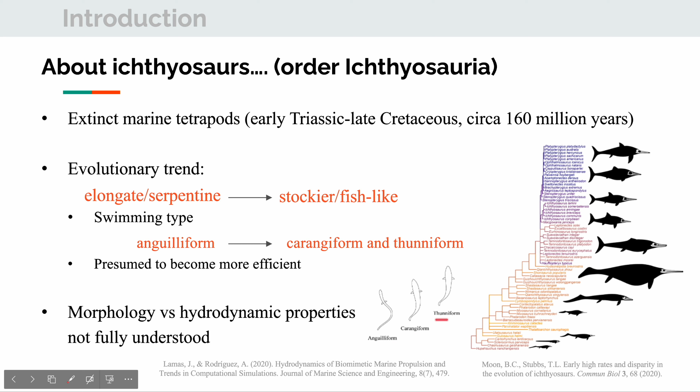When it comes to the locomotion of ichthyosaurs, there are still many questions about the relationship between their body plan and how they moved. Previous studies mainly focused on exploring their fossil morphology, leading to the question of whether a fish-like body plan is more efficient for swimming. While the hydrodynamic properties and cost of transport associated with this body plan remain unknown, some studies attempted to represent the shape of ichthyosaurs using empirically derived formulae, such as ellipsoids. However, these representations often deviate significantly from the actual shape of ichthyosaurs.

The aim of this study is to explore the locomotory strategy of ichthyosaurs. Specifically, the authors want to identify the effect of changes in their body plan on their locomotory energy cost and hydrodynamic properties.

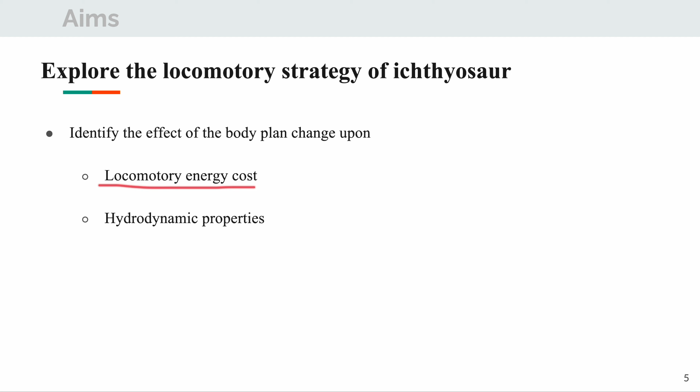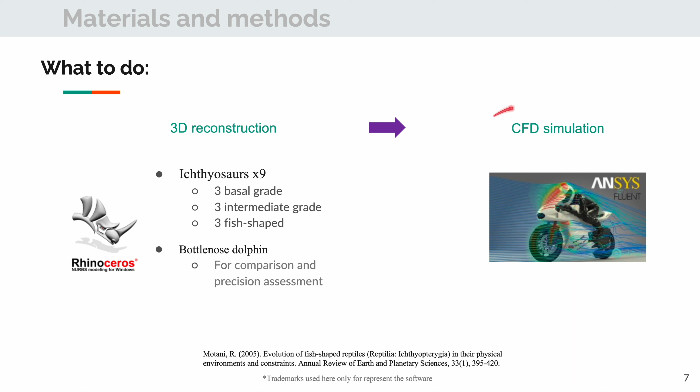Let's move on to the material and methods part. What they would do is to create 3D reconstructions of 9 ichthyosaurs and a bottlenose dolphin using Rhinoceros software. The ichthyosaurs would include 3 basal grade, 3 intermediate grade, and 3 fish-shaped specimens. The bottlenose dolphin would be used for comparison and precision assessment. After the 3D models are created, the authors would then perform CFD simulations on them, using ANSYS Fluent software.

In this study, 3D models of ichthyosaurs were reconstructed, based on well-preserved fossils. Basal-grade ichthyosaurs have a slender body shape, intermediate-grade ichthyosaurs have a transitional body shape, and fish-shaped ichthyosaurs have a torpedo-like body shape. The categorization of these grades was referred to a previous study. In addition to the ichthyosaurs, a bottlenose dolphin was also reconstructed, for comparison.

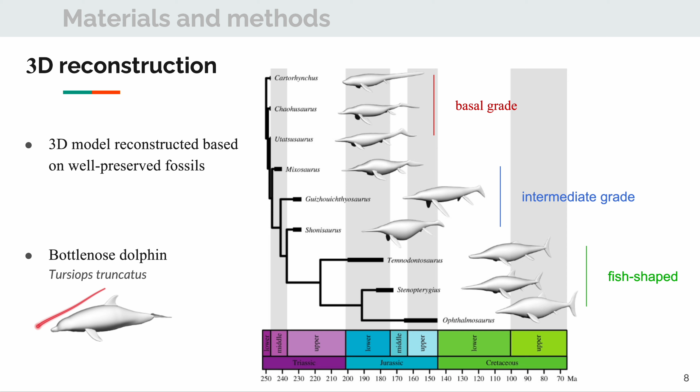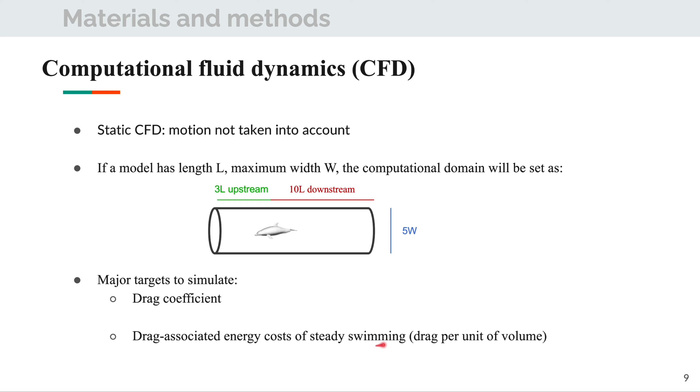In this study, static computational fluid dynamics simulations were used, meaning that motion was not taken into account. For a model with length L and maximum width W, the computational domain was set as 3L upstream, 10L downstream, and 5W in width. The major targets of the simulations were the drag coefficient and the drag-associated energy costs of steady swimming, or drag per unit of volume.

A static model was used for the computational fluid dynamics simulations. This decision was made for several reasons, though static models tend to underestimate the drag coefficient. Kinematic models, which take motion into account, are computationally expensive and require large sets of assumptions. Previous studies have shown that morphology alone has a crucial effect on drag, and static models can effectively mimic underwater gliding, which is common among aquatic animals.

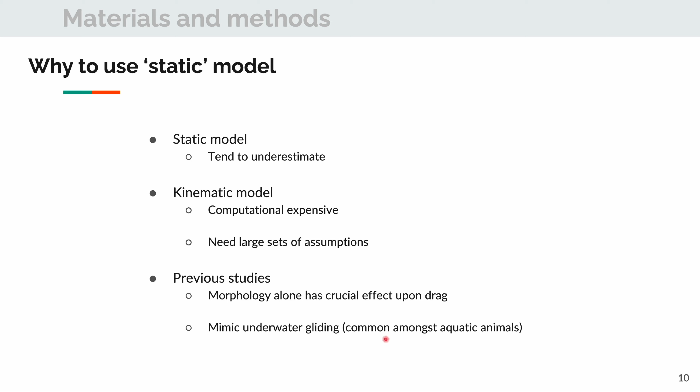Computational fluid dynamics (CFD) simulations were used to calculate the drag coefficient (C) of the 3D models. The drag coefficient is composed of two components, the frictional drag coefficient, CF, which is tangent to the object, and the pressure drag coefficient, CP, which is normal to the object. The total drag coefficient, CD, is the superposition of these components: CD = CF + CP.

The drag coefficient can be calculated using the equation C = 2D / (ρU²S), where D is the drag force, ρ is the water density, U is the flow velocity, and S is the surface area. Just notice that the drag equation, D = 0.5ρV²SC, can be derived from the kinetic energy equation.

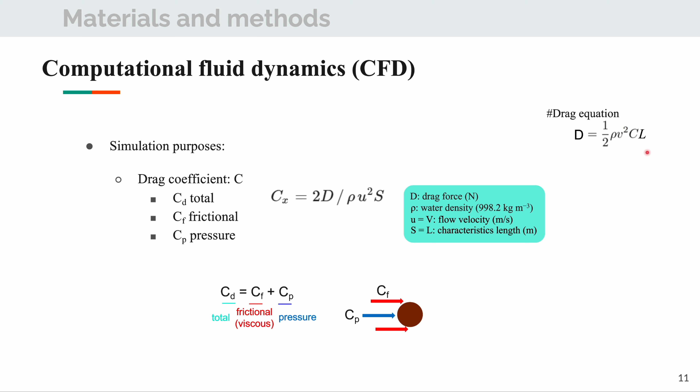One of the purposes of the CFD simulations in this study was the drag per unit volume, which represents the drag-associated energy costs of swimming. This is calculated by determining the energy spent in transporting a unit of mass a unit of distance, known as the cost of transport, COT. The COT due to drag, COT drag, can be calculated as COT drag = P drag / (mU) = D / (ρV), where P drag is the drag power, m is the mass, U is the velocity, ρ is the water density, and V is the volume, which is used as a proxy for mass.

The net COT, COT net, represents the fraction of COT that is truly used for locomotion, excluding other factors, such as muscle efficiency and metabolism. This can be calculated by dividing the useful power, P thrust, by the total power, P out, giving the propulsive efficiency η. If swimming at a constant speed, then P thrust equals P drag, and COT net can be calculated as COT net = P out / (mU) = P drag / (ηmU). In this study, a value of η = 0.81 was used for parvipelvian ichthyosaurs, and η = 0.48 was used for all other ichthyosaurs.

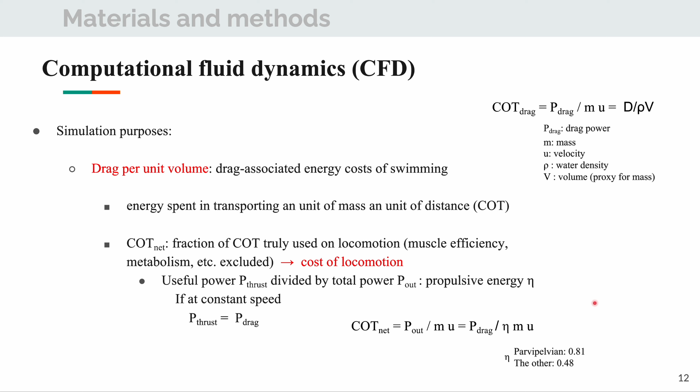In this study, the CFD simulations were performed under specific conditions. The Reynolds number, Re, which represents the ratio of inertial forces to viscous forces, was set to a range from 10^6 to 5×10^7, based on data from extant marine tetrapods.

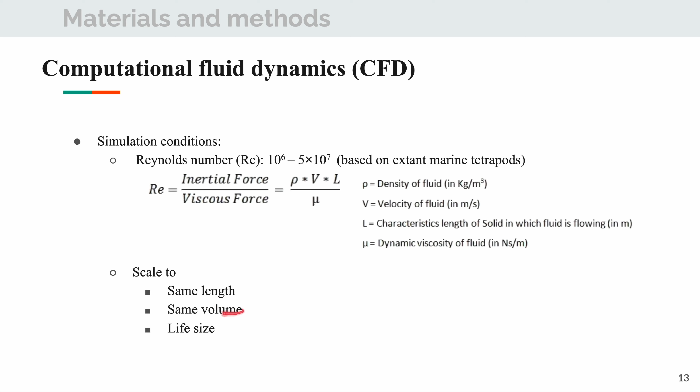The Reynolds number can be calculated as Re = ρvL/μ, where ρ is the water density, v is the flow velocity, L is the characteristic length, and μ is the dynamic viscosity. The results of the simulations were then scaled to the same length, volume, and life size for comparison.

It is important to note that this study is not concerned with the absolute values of the propulsive efficiency η, or differences between individual taxa. Instead, the focus is on the relative impact of changes in swimming mode on the net cost of transport, COT net, compared to the relative effect of changes in body shape.

Okay, then the next part will be results and discussion. The CFD results showed that the drag coefficient of ichthyosaurs did not change significantly with geological time, morphological grade, or the presence of limbs. The left panel is drag coefficient under different Reynolds number.

Without and with limbs, the upper right panel is the average CD through geological time in million years, without and with limbs. While the figures at right bottom are the drag coefficient amongst taxa, just from the collapse of figure A and B. There is no significant difference between taxa in all figures shown here.

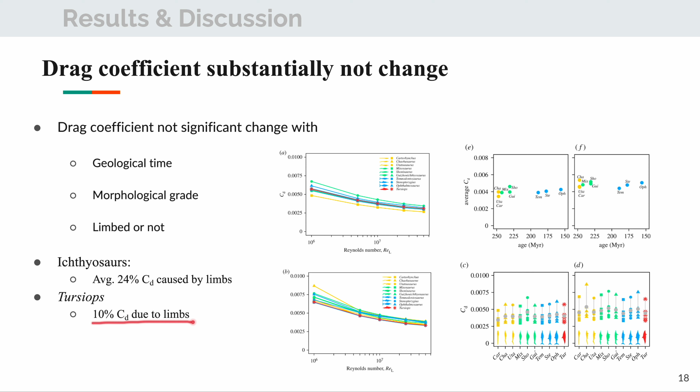On average, 24% of the total drag coefficient, CD, of ichthyosaurs was caused by their limbs. In comparison, Tursiops, the bottlenose dolphin, had only 10% of its CD due to its limbs, since ichthyosaurs' flippers are larger and their hind limbs present. Okay, a brief summary. Drag coefficient substantially not dropped through ichthyosaur evolution.

The results showed that, when the models were scaled to the same length, the basal group had a relative drag per unit volume 1.4 times greater than the other groups. This increase in drag was found to be correlated with an increase in the surface area to volume ratio, indicating the frictional component of drag was dominant.

However, when the models were scaled to the same volume, there was no significant difference in relative drag per unit volume between all groups. The upper panel is the relative drag per unit volume of unlimbed and limbed objects at same length. The basal group is significantly higher than the others, and all the ichthyosaurs are higher than bottlenose dolphin.

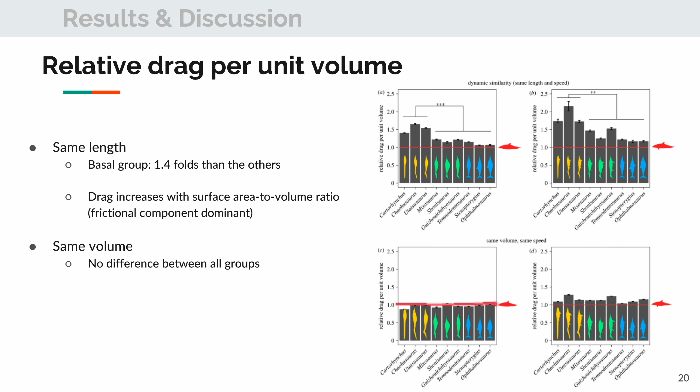The lower panel is roughly in the same condition, but scaled to the same volume. In this case, all taxa are basically at the similar level, and some even bearing lower value than bottlenose dolphin. Brief summary. Relative drag per unit volume not changed due to body plan.

The result showed that the cost of locomotion was mainly determined by the size and swimming mode of the ichthyosaurs. The net cost of transport, COT net, was found to be different between swimming modes, with anguilliform swimming less efficiently than other modes. The COT net also varied between different size groups due to the fact that volume increases with the cube of size, while surface area increases with the square.

The COT net was found to vary between different geological periods due to changes in the size of ichthyosaurs over time. The upper figures are the COT net of models without and with accounting for their swimming mode, standardized by bottlenose dolphin, the red line. The anguilliform swimmers have higher cost of locomotion.

The bottom right panel is the same as above, but put back to real size. The larger ichthyosaurs have lower cost of steady swimming, some even lower than bottlenose dolphin. And the figure at the left bottom is the COT net of ichthyosaurs through geological age. You can observe that, after their first 25 million years of evolution, their body size maintained at a constant level.

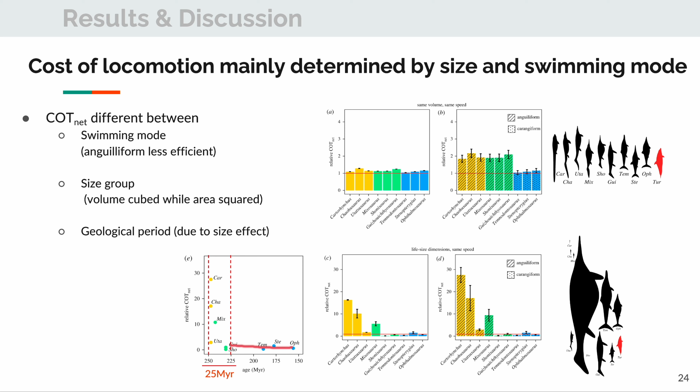Brief summary again. Size plays a dominant role while swimming mode has a minor effect on the cost of locomotion. Net cost of locomotion reduces significantly during the first 25 million years of ichthyosaur evolution.

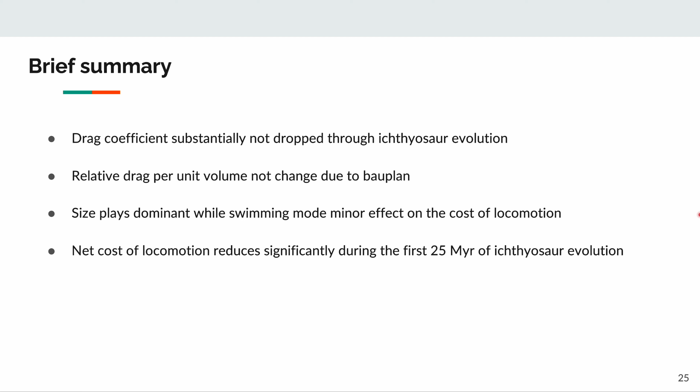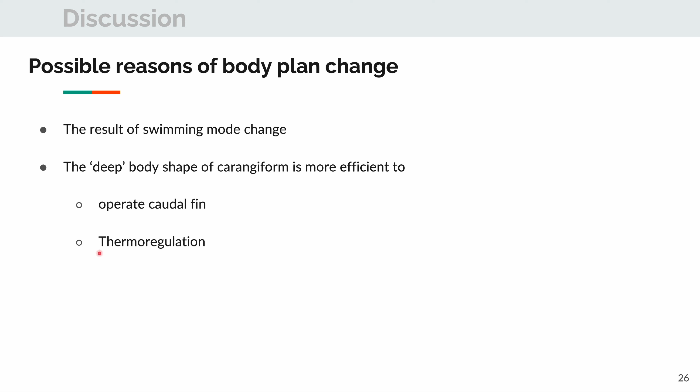There are several possible reasons for the changes in body plan observed in ichthyosaurs over time. One reason could be the result of changes in their swimming mode. For example, the deep body shape of carangiform swimmers is more efficient for operating the caudal fin. Another possible reason for the change in body plan could be related to thermoregulation.

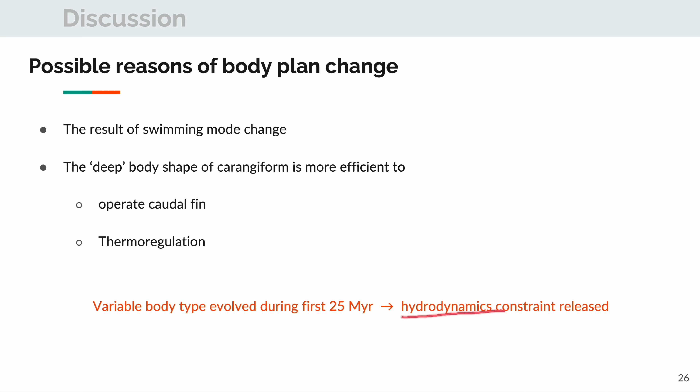It is also worth noting that variable body types evolved during the first 25 million years of ichthyosaur evolution, suggesting that hydrodynamic constraints may have been released during this time.

If being big is so great, why were there still small-sized ichthyosaurs in their late evolutionary stage? One possible explanation is small body size bearing several advantages. For example, small ichthyosaurs would have had lower energy demands, meaning that they would require less food to survive. They would also experience lower total drag force when swimming. These advantages could have made small body size adaptive in environments where food was limited.

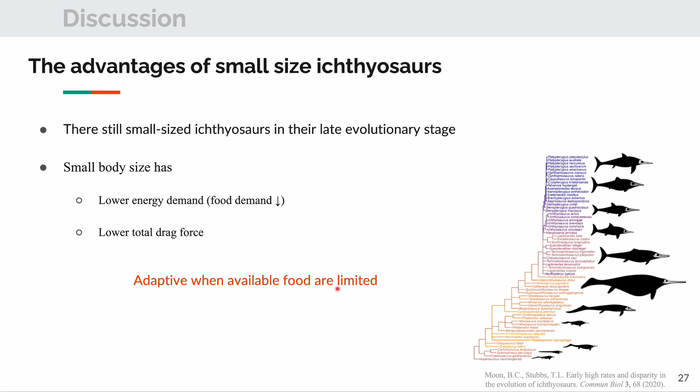One potential drawback of the methodology used in this study is that the net cost of transport, COT net, was estimated at a flow velocity of 1 meter per second, which may not be the optimal condition for all ichthyosaurs. For large ichthyosaurs, they may have an optimal cruising speed, U-optimal, greater than 1 meter per second,

while small ichthyosaurs may have an optimal cruising speed lower than this value. However, estimating the optimal cruising speed requires knowledge of the drag coefficient, which conflicts with the purpose of this study.

Finally, the conclusion. Large bodies and efficient swimming mode lower the cost of steady swimming, making ichthyosaurs more adaptive to pelagic existence.